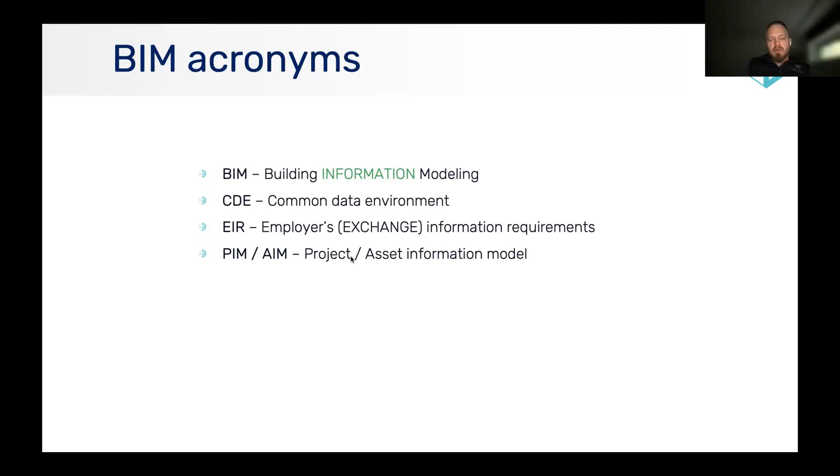Then we have another document, BEP. I hope you already heard about it. In a simple way, it's a document which describes how everything is going to be made, what kind of workflows will be prepared, and the responsibilities, etc. So as I said, it's the main document for execution of requirements.

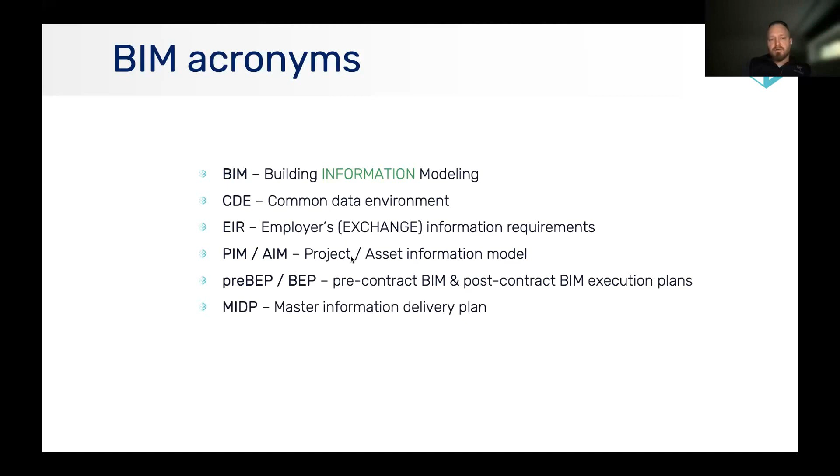Last but not least in this list is the Master Information Delivery Plan. It's also important to understand what kind of documents, document packages have to be prepared and handed over to the customer at the end. In a simple way, it's one big spreadsheet where we have a list of all information, data, documents, etc. that is handed over at the end of the project.

What else do we have? We have level of geometry, level of information, which combine into one. We have level of development, or level of detail.

No matter how we call it, we need to understand that we need to agree how much we have to prepare BIM, because just to say I want BIM doesn't answer any question. This is also important for all stakeholders, not only for the customer, but also for the design teams, how much they have to go into details and so on.

Then I hope you also know IFC. This is one of the open standards. The IFC standard is actually not new. If I remember correctly, it was created in the early 70s, but only now, these days, we are starting to be able to use this idea which was created like 50 years ago already.

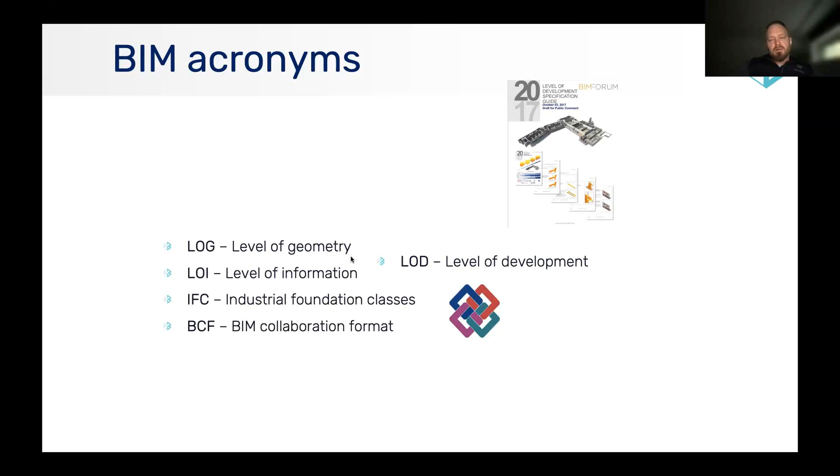Then another standard is BCF, the BIM Collaboration Format, which compared to IFC is, I would say, a new one. It counts, I think, like 8 to 10 years. But again, this is a very crucial format for collaboration between different stakeholders.

All these standards are standardized by the company buildingSMART, a global association which creates and talks about these standards, how they should work, etc. About these standards, Alexander will make a more detailed presentation, and he will talk a bit more about this in the second half of this webinar.

So then we have PAS. Just to understand what is PAS, it's a publicly available specification, and simply to understand it, it's like a standard or a code which is mostly a British standard, so it's used in Britain, but it was created also like in 2013 or something, and it became a global standard for multiple countries around the world.

We also used it and are using it until today because the principles are correct, and how the project has to be executed in a BIM environment, it describes in the correct manner. But after Brexit, since Britain was one area with Europe, there was the ISO standard which was started to develop, and a lot of things actually came from this PAS to the ISO. It reflects more or less the same ideas.

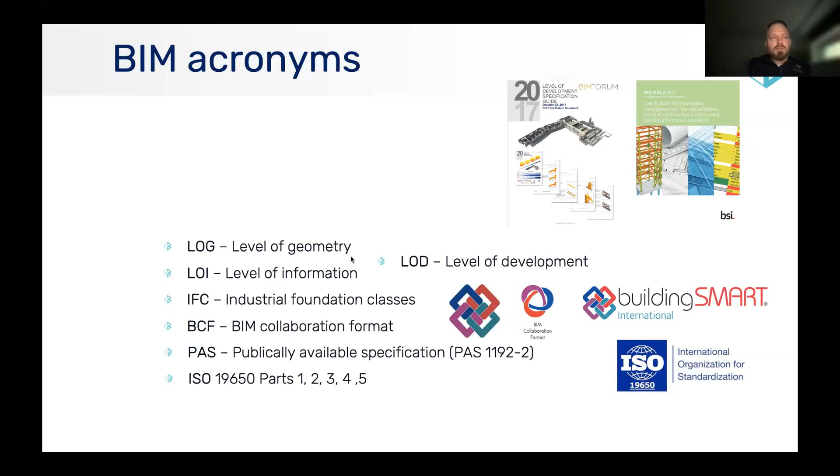So today, my idea is to show you the workflows of both of these standards and maybe to compare a bit, or to see what is the difference. So without further ado, let's jump into the PAS standard. I called it old, but it's actually still usable, and a lot of countries are using it till now.

So from this document, which in the acronyms I mentioned, it was Employer's Information Requirements. Now it's called Exchange Information Requirements, but the initial idea is that the client, the customer, has to be specific and to understand why he's asking for the BIM. Well, then we have the procurement phase.

On the basis of this document, the procurement should be executed. And the first step, according to the standard, is that the BIM execution plan should be prepared. What this consists of, in one document or another, we will also look at it later. But generally speaking, there are the requirements and procurement, and then the preparation, where the contractor who wants to tender has to show his capabilities to execute the client's requirements.

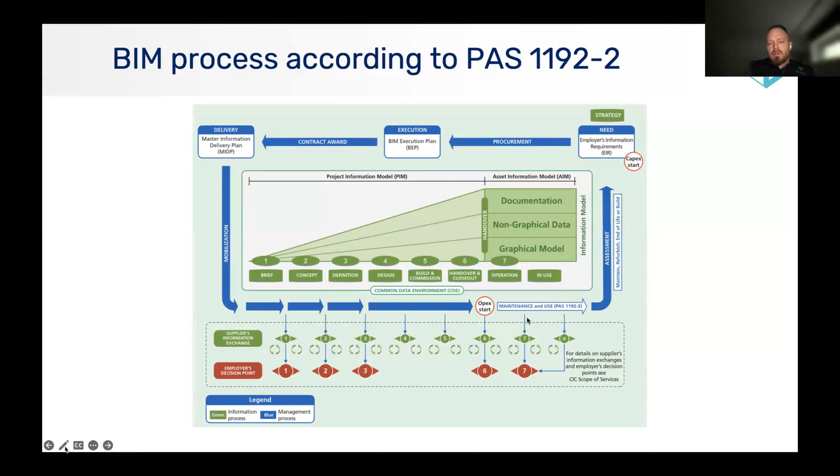This whole green-white area is collecting and placing all this data in one place, or how you like to call it, one source of truth. This is what I said: constant exchange, constant control, and managing of all the deliverables.

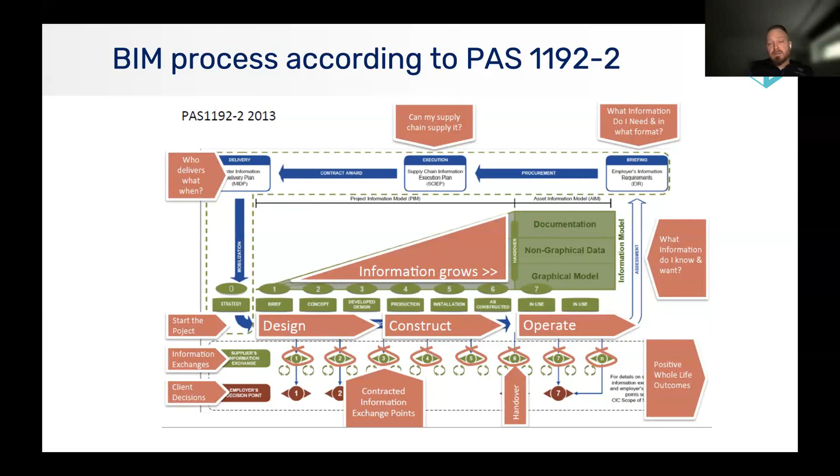So moving slowly to ISO 19650, I called it a new standard, but as I mentioned, there are multiple standards which we are not talking about today. We're focusing only on 2 of these to compare them and understand the differences. The idea of it is the organization and digitalization of information of building and civil engineering works, including building information model - information management using building information model. So it consists of 5 parts.

It has parts 1, 2, 3, 4, and 5. The first part is concepts and principles, so today we also will focus mostly on this one - on this first part, because it's also talking about how it should be managed, how it should be executed, and what kind of results should be delivered.

Then part 2 and 3 focus actually on the data management - what kind of data should be, how and in what way, in what formats, and so on, it should be delivered in, let's say, the execution phase and then in the operational phase.

Part 4 is the latest one. It talks mostly about requirements for this CDE - common data environment, or the server or place where we're keeping and exchanging the information. Last but not least, part 5 talks about security questions, which is becoming more and more important, and it's needed to solve a lot of things because we're putting a lot of sensitive data, and it needs to have some security levels.

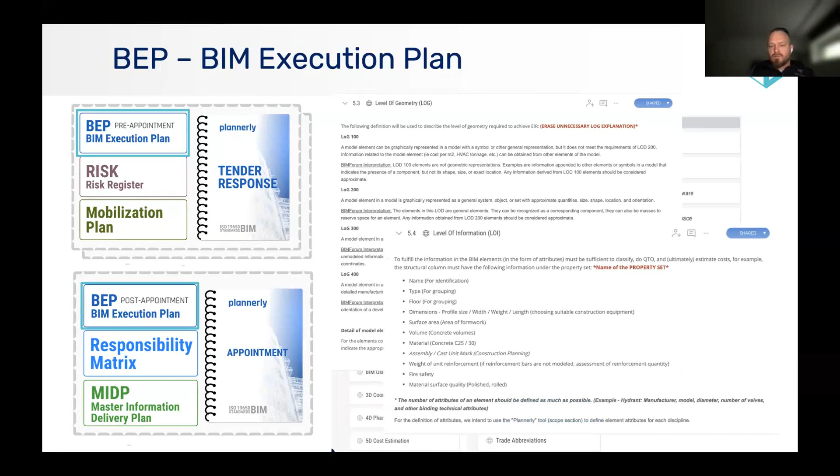We're talking about level of information, how much information has to be put in a model, why it's needed, in what format, and how it's going to be used in other phases. It has to be very clearly described and shown so that everyone using it can understand.

This is a simple example: let's say we have an architectural part, we need some slabs or interior windows. What kind of parameters has to be in a model, in which phase, in which level of detail, and so on. This is a hard topic - if not using specific tools for that, it's really tough to explain to other parties what should be achieved.

About this, Alexander in his part will show some documents on how to navigate in this area and understand what could be asked.

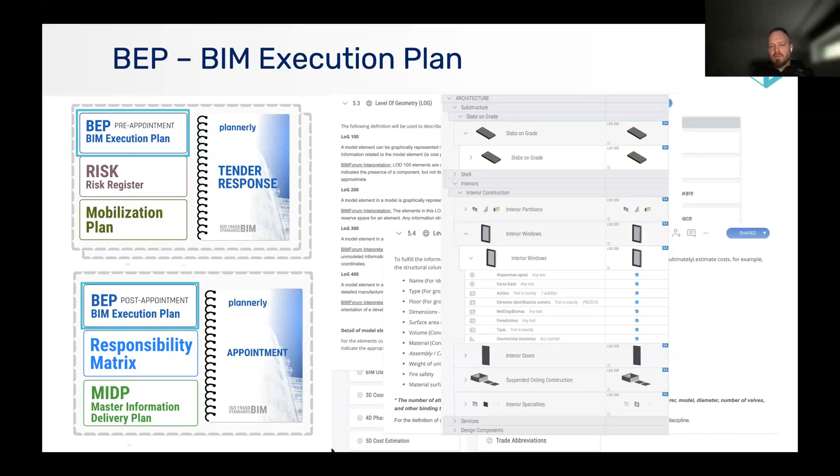So another thing: risks again have to be managed and maintained. Everything is related to the requirements, the team, what experience we have, and so on. For example, we have to also foresee our risks - too many clashes, that's easy to understand, but it could also be too many BIM, or not enough BIM. These kinds of risks are also put into this process if we are not describing and clarifying all those requirements for all the stakeholders.

Okay, what else? Mobilization plan. Again, talking about the past, it also talks about possibilities - technological possibilities, resources. Maybe we need some training, maybe we need some additional software. So it's needed to review the internal infrastructure of the software. Maybe it's needed to get some subcontractors to cover some areas.

So again, one of the topics can be skills and training for the team - how the team is prepared, what experience they have, and to collect the whole team according to the requirements so they're able to understand and execute. From my experience, I can tell you, I had one project some time ago with one company in a team.

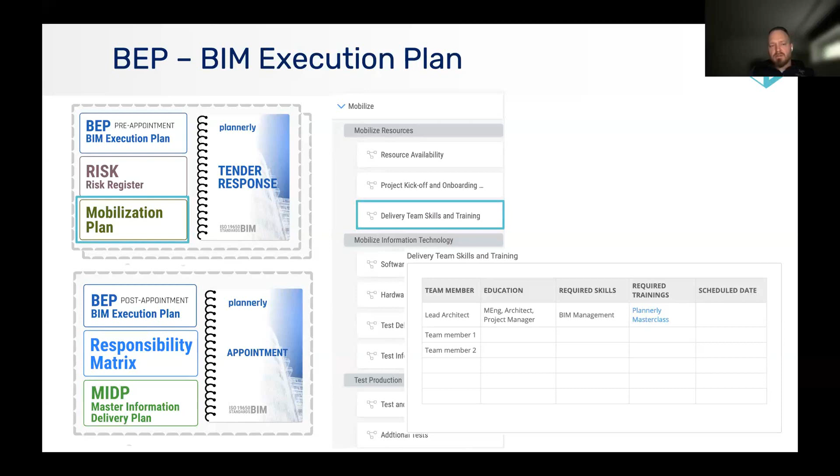It had some software requirements. For software, there are also specific requirements, and the question was whether you are leaving the team or investing and buying new software to be able to execute the project. This is an important topic to understand: first, to understand the requirements, and second, to understand that you can execute them.

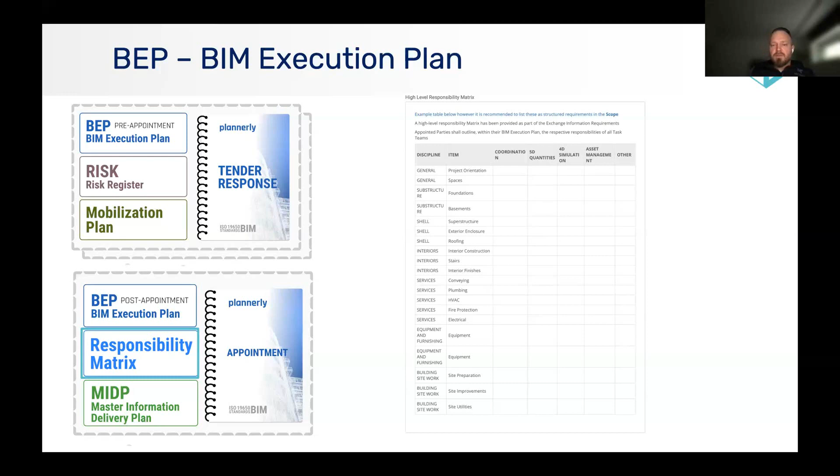Responsibility is again a crucial topic. There are multiple stakeholders involved in a construction project, a lot of people doing different things. But as mentioned, the standard talks not only about BIM, modeling, or the design phase, it talks about the digitalization of all documents. So any person doing something on a project is involved in these processes and the tools they're using. They need to understand what they're doing, why they're doing it, and how. So this must be listed: who is doing what, when they're doing it, and how they're doing it. This is again very important.

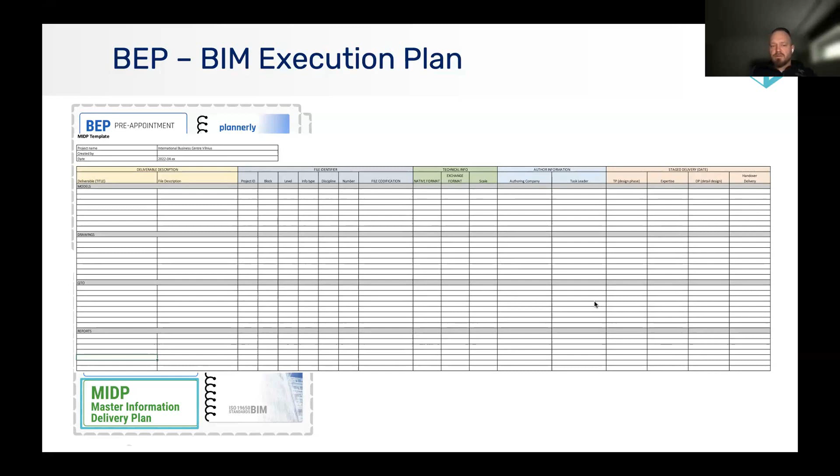The MIDP was already mentioned a couple of times, and it was also in the PAS standard. I just wanted to show you a simple example of how it would look. It's a big spreadsheet listing all the stakeholders and what they will deliver. If there is a design team, it should list the architectural part, structural part, models, drawings, explanation letters, etc. - everything important for the project execution. It has to be listed and dated when the deliverables will be delivered, and who is responsible to approve it, and so on. This is the second part of this workflow, which describes a big part of the documents prepared by one party or another.

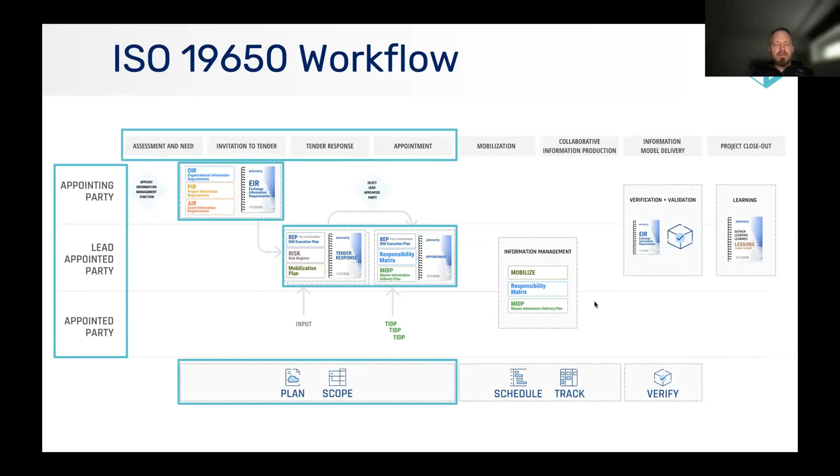To simplify, at the top we have phases, at the bottom we have actions. This is the deadline - let's say the deadline for the contract signing. At this point we are signing the contract, and we have all the answers to the requirements, and we can say yes, we are ready. We know what's needed to be done.

So the preparation works take more time than we are used to. I know that in the construction market we're always lacking time. Even last week I heard from a construction company, they said, we signed the contract and the next day we're on site already starting to dig foundations. And I said, why are you doing that if you don't know what you're planning to build? It's already programming problems, issues, and additional costs into that workflow. Yes, you have to spend more time on preparation, you have to prepare a lot of documents, but this helps you understand what you're achieving, who is doing what, and allows for better planning and more sufficient execution.

This is the first half of this standard workflow, and then we're going to execution, generally speaking - the project execution phase. It consists, again, of this mobilization phase from the beginning. Maybe some newcomers are coming, and they also have to get familiar with the requirements, what they're doing, their responsibilities, and so on. Mobilization is prepared by the lead appointed party and all the parties involved - let's call them subcontractors. They all have their own responsibility matrix, they all have delivery plans, and so on.

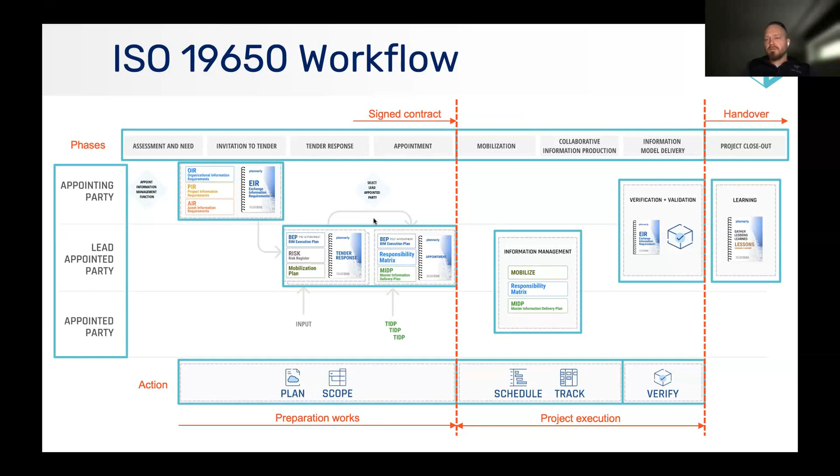And yeah, this is a handover. From here, we are giving this project to the exploitation phase. So very shortly, to understand.

So what are the takeaways from here? What is important - as I said, during an hour or 45 minutes, it's not possible to explain and go into details, but my goal for today is just to give you some thoughts and ideas about what is important in these standards. So again, it's not just BIM - BIM is just a part. When we're talking about BIM workflows in a project, we're talking about project digitalization and handling of this data.

What else? Appointing and appointed parties - just for you to remember, if you see the appointing or appointed parties, this is the client and the contractor. This is just to keep in mind and to have understanding.

Very important - project requirements. There cannot be a project without requirements. If the client doesn't define what he wants to achieve, there will be no good result. This is the basic for any project related to BIM technologies - it has to have requirements. Bigger, smaller, one page or 25 pages, it doesn't matter, but the client needs to understand what he's paying money for. So preparation - I know it's tough, but we need to try and go into that. Preparation is the key to success. We need to spend time preparing and be sure that we can achieve the goals, then start digging.